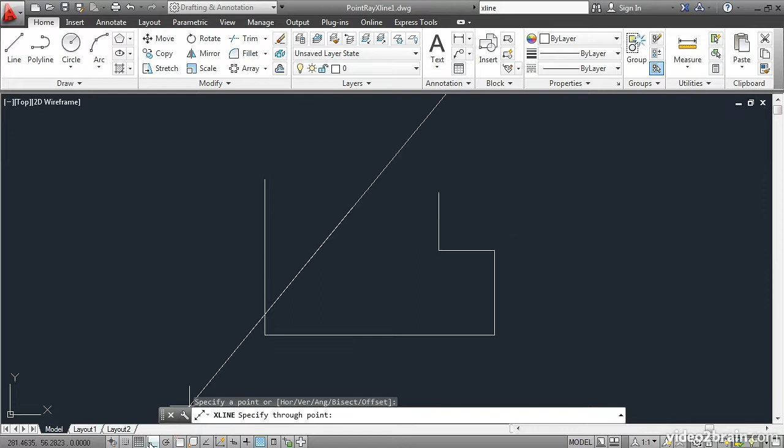I'll click a point right about here in between these two vertical lines. And as I move the cursor, you can see that I can rotate this X-line about the initial point that I clicked. I'd like this to be a horizontal line, so I'll use Ortho. I'll move to the left or the right so that this goes horizontally, and then I'll click and press Enter to end the command. So right now this is an X-line, meaning it goes off to infinity in both directions.

I'll use the Trim tool here on the Modify panel, and on the command line it says Select Objects or Select All in angled brackets. I'd actually like to select all the objects in the drawing as potential cutting edges for the trim operation, so I'll press Enter to accept the default. And then I'll click the objects where I want to trim them. In this case, I'll click here, here, and here. I'll press Enter to finish the trim command.

So right now I trimmed away the X-line and actually turned it into a ray. Rays begin at a point and go off to infinity in one direction. I'll trim off this edge as well. Trim, Enter, click, Enter. Now we have a line object. So X-lines and rays are easily convertible into lines by trimming.

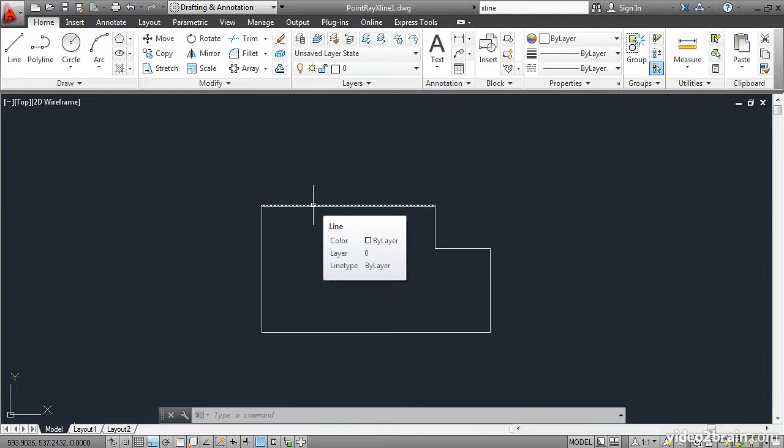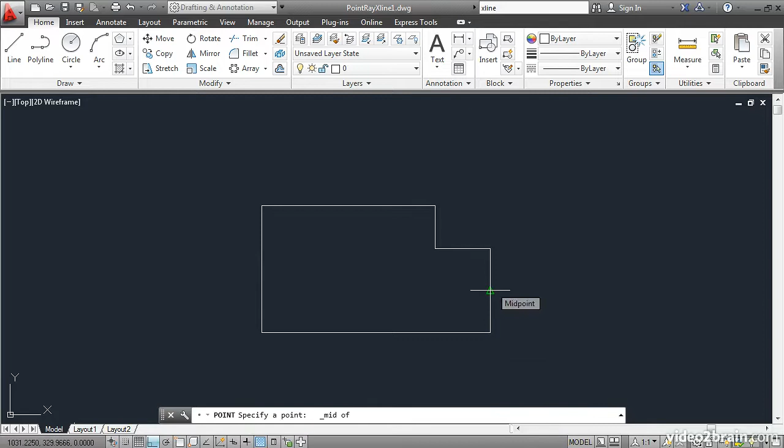The next thing I want to do is create a point object. So go up to the Draw panel, expand the slide out, and click the Point tool. Snap that to the midpoint of this vertical line by holding down Shift, right-clicking, and choosing Midpoint from the Context menu. Then click on the midpoint to create a point. Press Enter or Escape to end the command.

We can't see the point at this moment. Let's erase the line. Erase, select the line, and press Enter. There's the point, but it's very small. It's only 1 pixel in size. You can enlarge the point display by typing ddptype. This is a very old command. dd means dialog box, and ptype means point type.

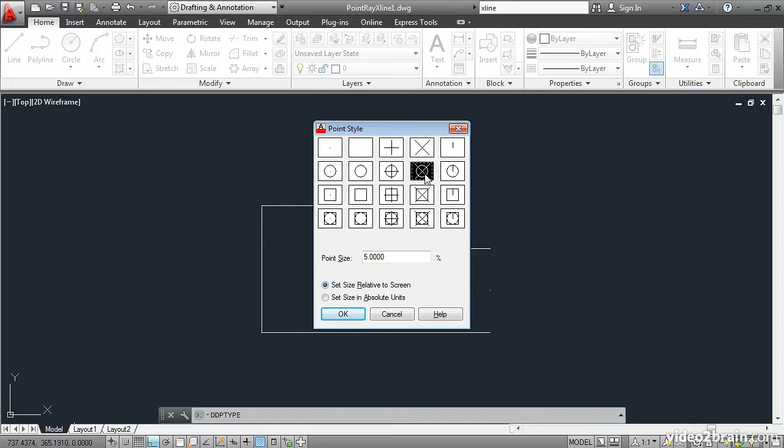So I'll press Enter, and we have a variety of point styles to choose from. I'll select this symbol and click OK. So now the point has a larger appearance, but it's still a point of null size. So now let me go ahead and draw an arc. I'll open the Arc flyout. I'll create an arc using the Center Start End method.

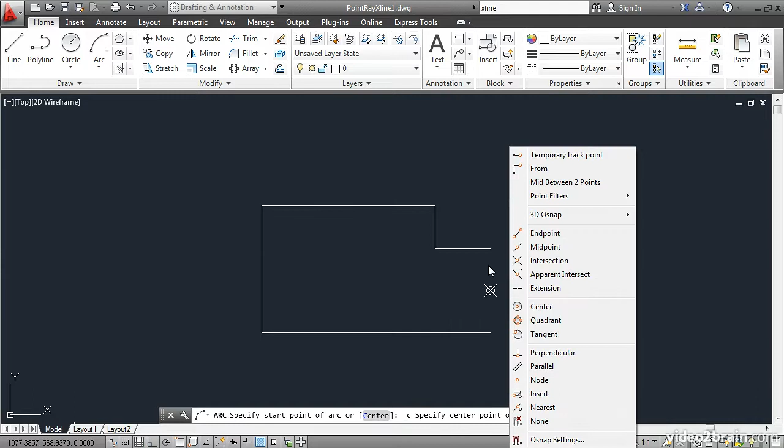And I'd like to snap the center to the point. To do this, you have to use a specialized object snap called Node. Shift right-click, choose Node, and then click on the point. Shift right-click and choose Endpoint, and click on this endpoint. And then Shift right-click and choose Endpoint again, and click right here to complete the arc.

Let's offset this existing arc some arbitrary distance inside. Use the Offset tool, which is located right here in the Modify panel. It says Specify Offset Distance. I'm going to do that not by typing in a number, but by clicking 2 points. I'll click approximately here without even bothering to snap anything, because I'm doing this arbitrarily. And then I'll move in here and click another point, about here. That sets the offset distance interactively.

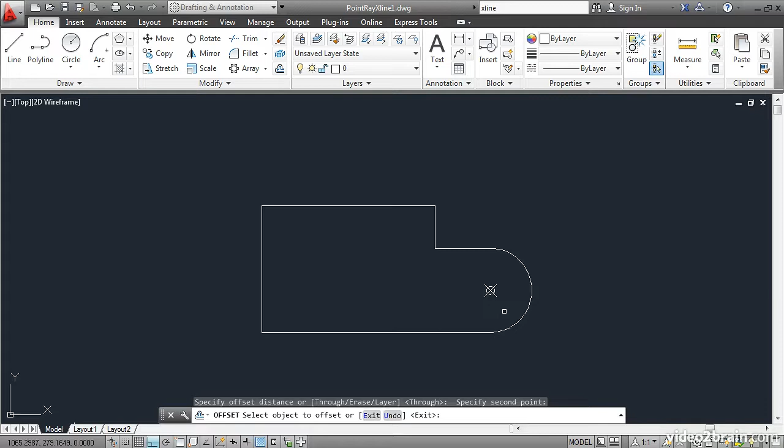Then it says Select Object to Offset. I'll select this arc. And then you can see that as I move the cursor in or out, I have the option to offset a new arc in either direction. In this case, I'd like it to be inside, so I'll click right here to generate a new concentric arc, and then I'll press Enter to exit the offset command.

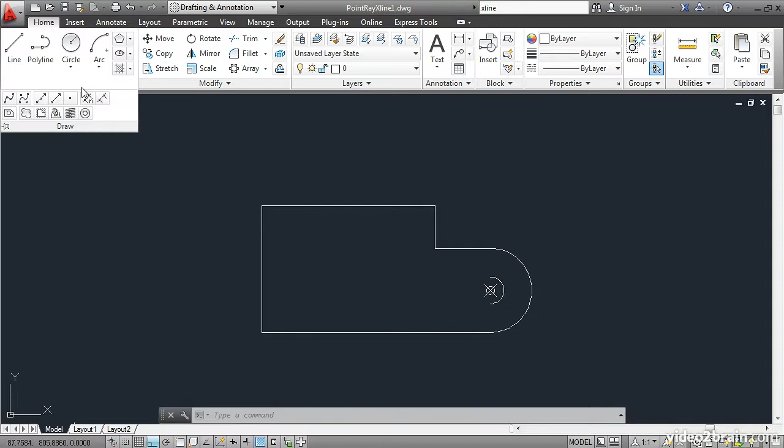Let's use the ray tool here, and let's start the ray from the node associated with the point. So Shift right-click, Node, click on the point, and because Ortho is on, I can draw this ray up vertically. I'll click a point and press Enter to draw in a ray. Now I'd like to array the ray.

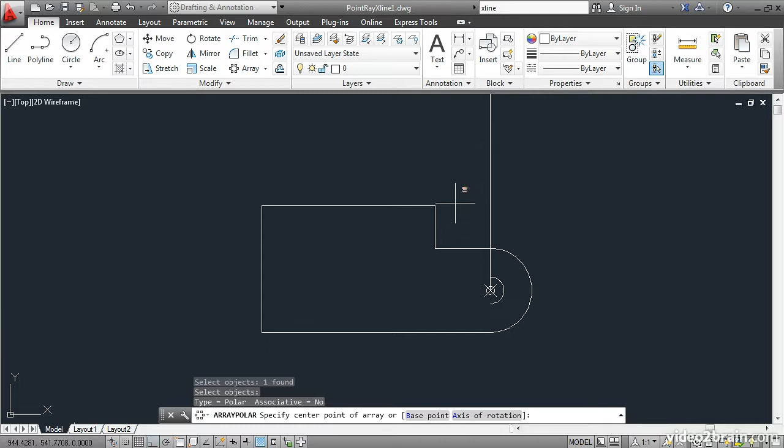I'll do that here. Open the flyout and choose Polar Array. Select the ray object, press Enter, and it says to specify the center point of the array. Well, that's the point object. Shift right-click and choose Node. Select the point's node, and then go up here and change the number of items to 32. Make sure Associative is not checked, and click Close Array. Now we have a series of rays going around a circle like this.

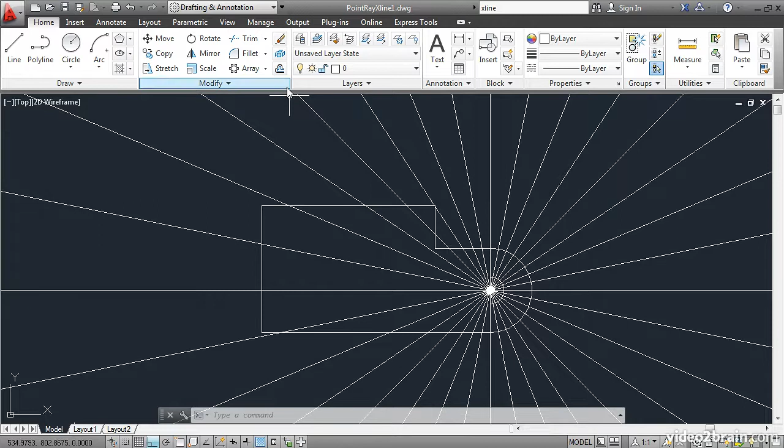Let's erase some of them. Erase all of these rays over here on the left side. I'll click down here and make a crossing window that crosses a series of these rays. It's a little bit quicker to select them in that way. Press Enter, and they're gone.

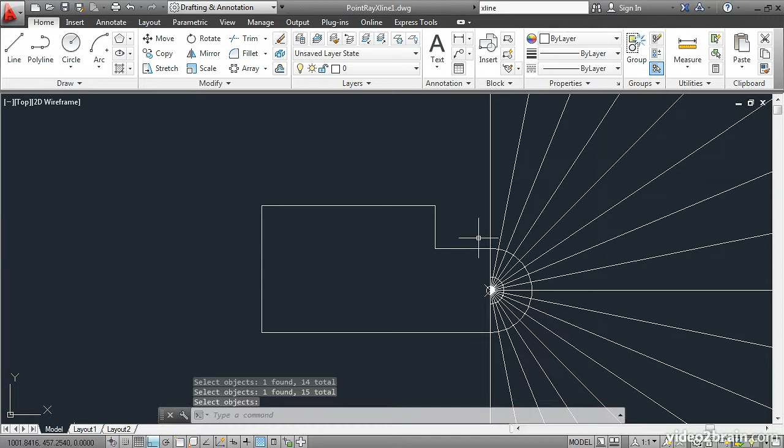Now let's trim away these rays. I'll use Trim. I'll select the outer and inner arcs, and for this I need to zoom in by rotating the mouse wheel. I'll click here and press Enter. Then I just need to click on these rays to get rid of the portions which I want to trim away. And I can do that quicker by making a crossing window, like this.

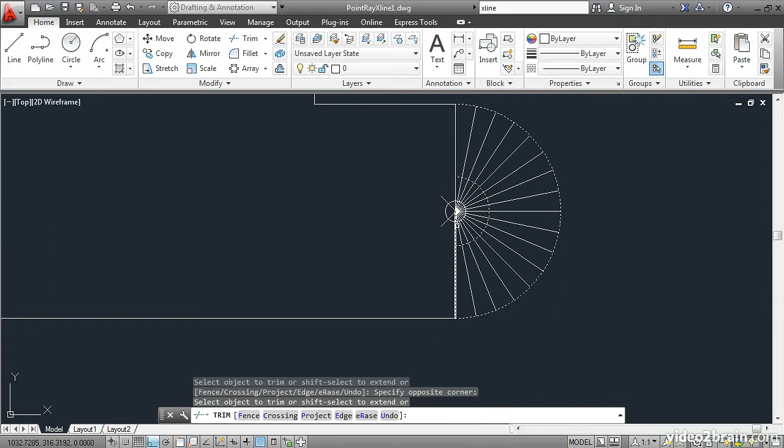And then inside here I want to do the same sort of thing, so I'll zoom in and then make a crossing window to get all of those and get rid of them. Press Enter, and you're done. Double-click the mouse wheel to zoom out. You have now learned how to use and style point objects, how to create and trim rays and X-lines, and have explored several editing tools in the process.